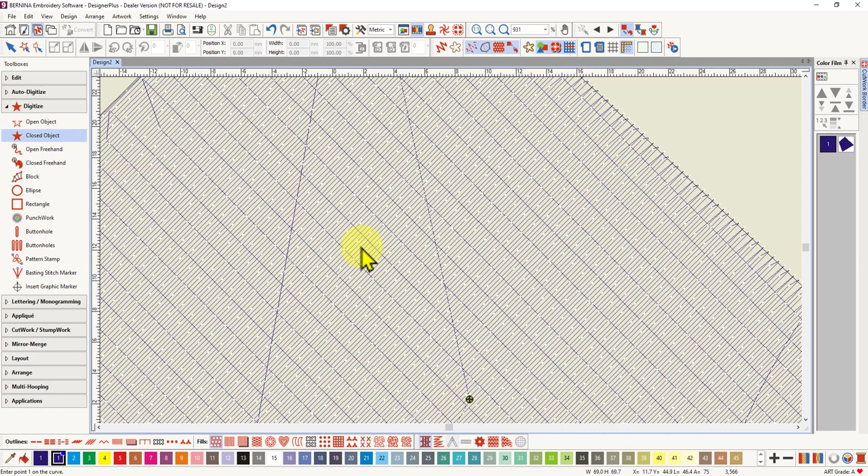If I bring it back into True View, it's a bit harder to see, but you can see that they're all going in the same angle throughout the whole shape. Now sometimes you want the stitches to be going at different angles around a shape.

So there is one way of doing this, using the block digitizing tool. I'll just select that object and delete it.

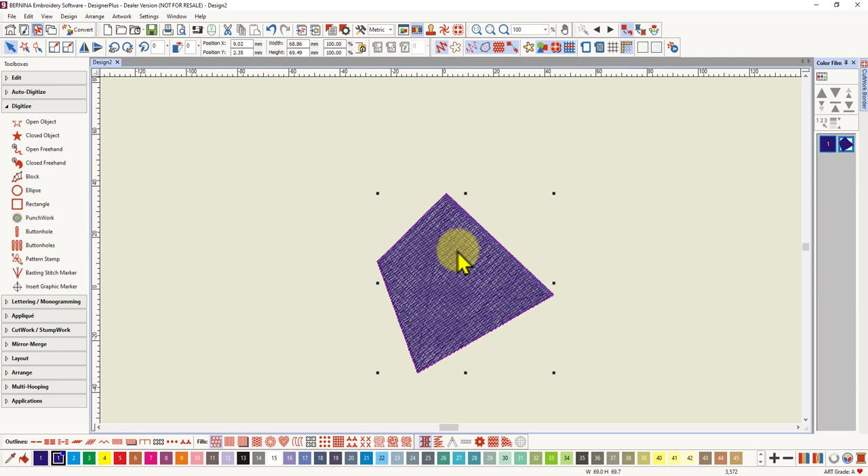You can select an object by clicking on it, or by clicking on it in the color film. So I'm going to, and then you can just hit your delete button and that will delete it. I could have used the undo button up here, but I chose to delete it. There's often lots of ways of doing things in the software.

Right, so the block digitizing tool is here in your digitize toolbox, so you can just select it. Now, you can use left or right clicks. I'll start with just left clicks, and this will give me straight lines. Remember when we were digitizing before, a left click gave us a straight line and a right click gave us a curve. So we're going to use 2 left clicks to start our object.

So I'm going to left click, and you'll see you've got a string, and then you left click again, and you've still got a string. You need to come back to the first side of your digitizing and left click again, and then you can make this any length you like. These lines that join the 2 outside lines are your angles.

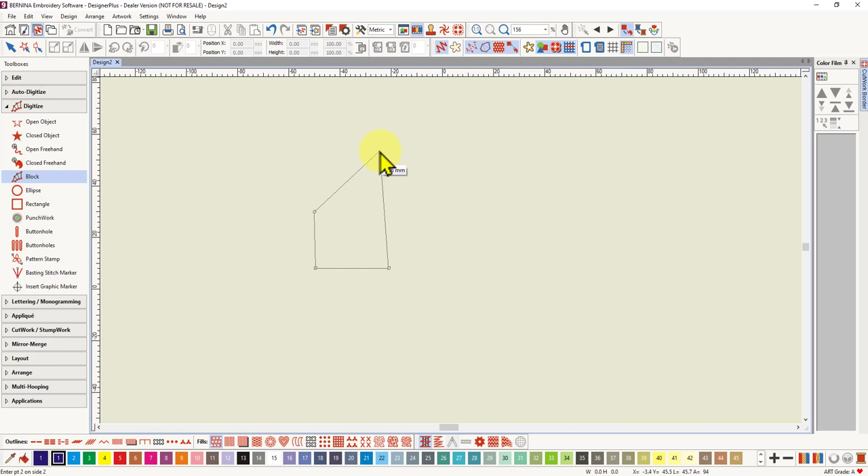So the first angle here is almost horizontal, and then I'm going to do a 45 degree angle roughly. The little measurement is telling me how long or how wide my stitching is for the object. So if you're doing satin stitch, that's important. I'm making a very big object here, but never mind, we'll just continue on.

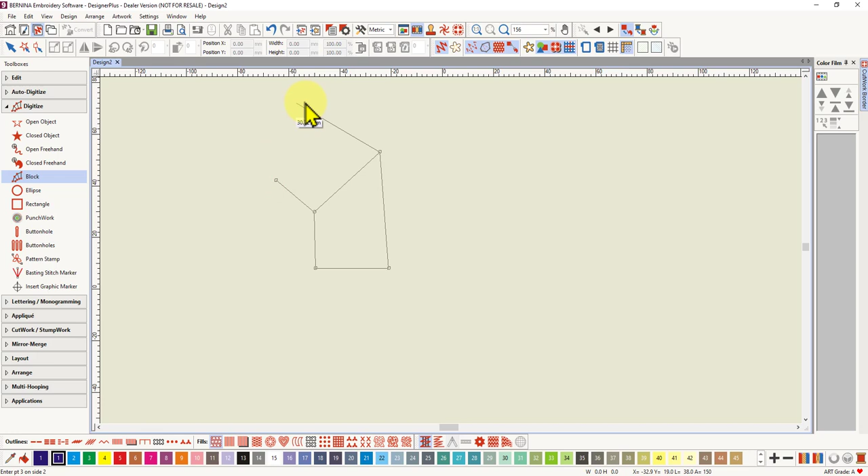So if I left click here, I've created that angle and I've created a block, and now I'm attached back over here. So I can create my next block. I can left click here and left click here to create my next block. Left click here, left click here to create my next block. You're basically clicking on each side of the object that you're creating, and when you're happy with your shape, I'll make one more block here, and you can hit enter to create the stitches.

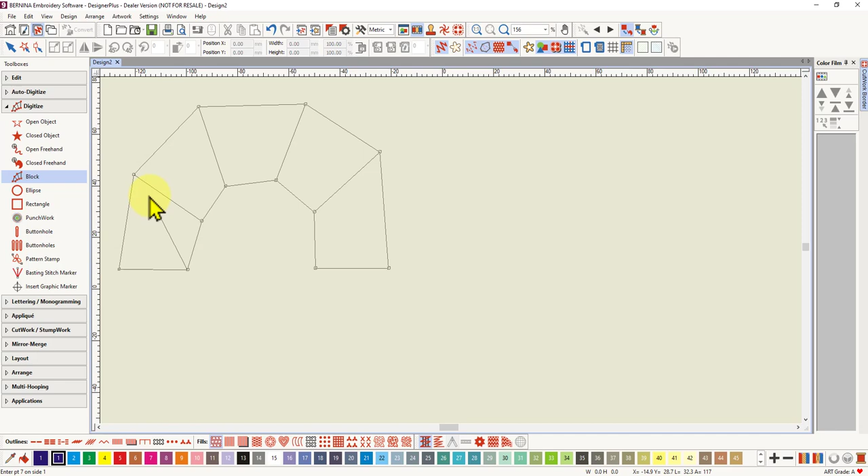And as you can see, the stitches are radiating out. If I go out of True View and zoom in, you can see that my stitches are radiating out in those angles.

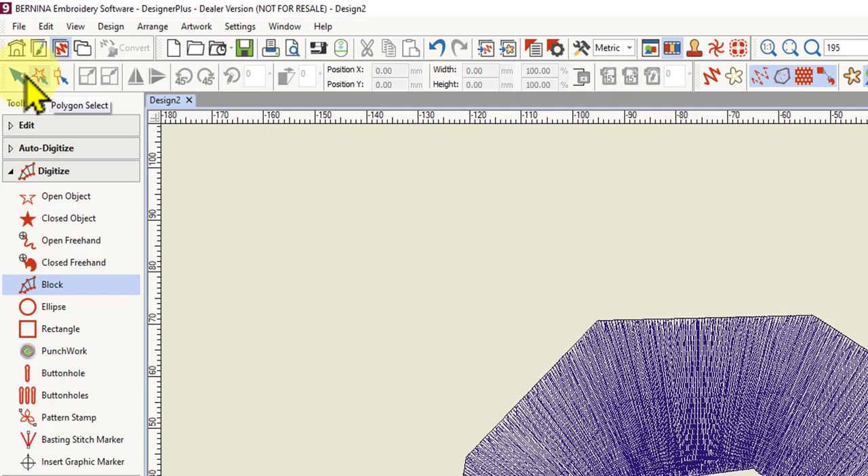There is a tool called the reshape tool that you can reshape objects with, and that's up here next to the select tools. If you click on that, it will actually show you those angles here with the little orange handles, and if you hover over them, they'll tell you what the exact angle is. That one's 109, this one's 69, this one's 42, and this one is, oh, there isn't one there because that's just the outside.

And same on the inside, it'll tell you if you hover over those as well. So this creates angles, as I said, around the object.

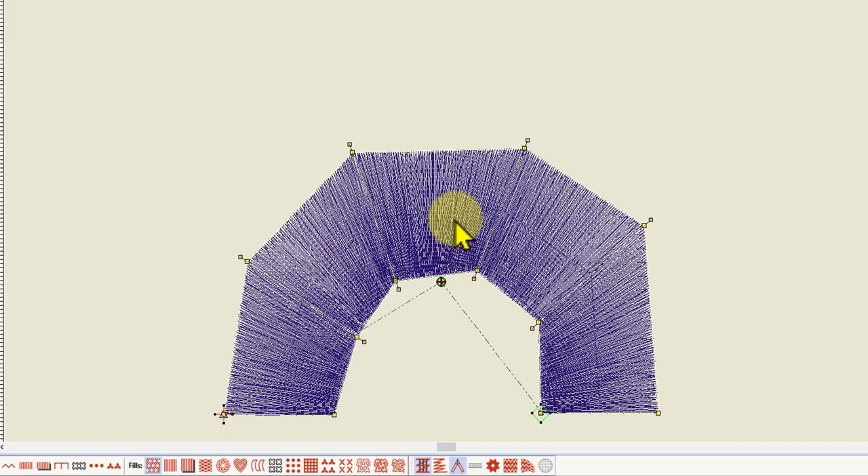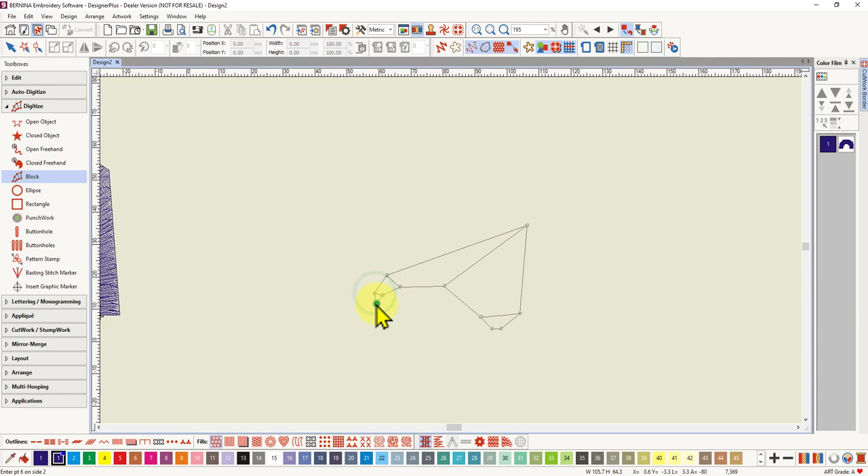Let me zoom out and make a much smaller object over here. You can get your tool again, and you can have a very small block going to a wider block, going to a wider block, back to a smaller block, enter. So you can create, and as you can see the stitches are radiating out.

You can create all sorts of shapes like this. As I mentioned before, we can use right clicks as well. So if I right click, and right click, and right click and right click, it won't curve until I get to the second block. Now you can see it's starting to curve.

So my blocks, my outside shapes are curved, but my angles are still straight, indicating the angle of the stitching. So they were all right clicks, and I've got this curved outer edge. Let me try and do another shape.

So two very close together, two wide apart, two closer together, and two closer together. And you can do them very close together as well by zooming in. So almost next to each other, and then enter. So again, you're just creating your blocks.

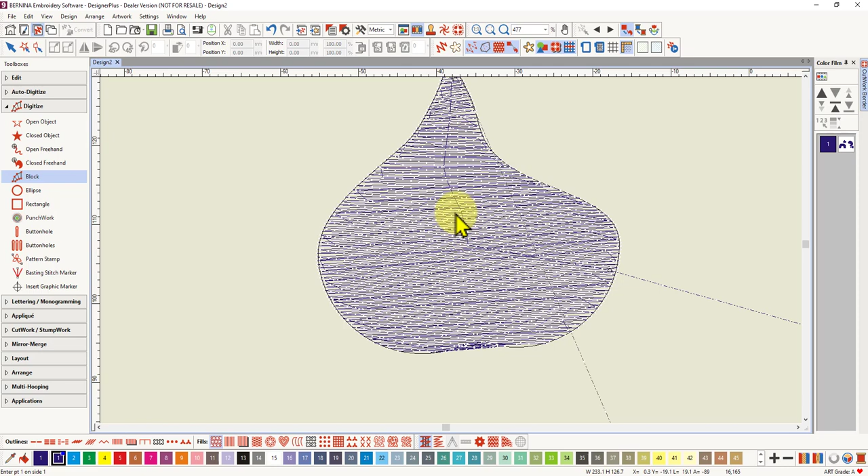In this case, most of my angles were almost straight, so this hasn't created a lot of different angles. But they do vary slightly. So it all depends whether you're going around a shape or whether you're just creating a block, which sort of digitizing you'll use. Go back to true view so you can see all of those.

They're all very big objects. Let me just select them all and shrink them down. I can select with a box select. So that's using my select tool, left clicking and dragging a box around all the objects. That's selected them all, and I can shrink them all at once.

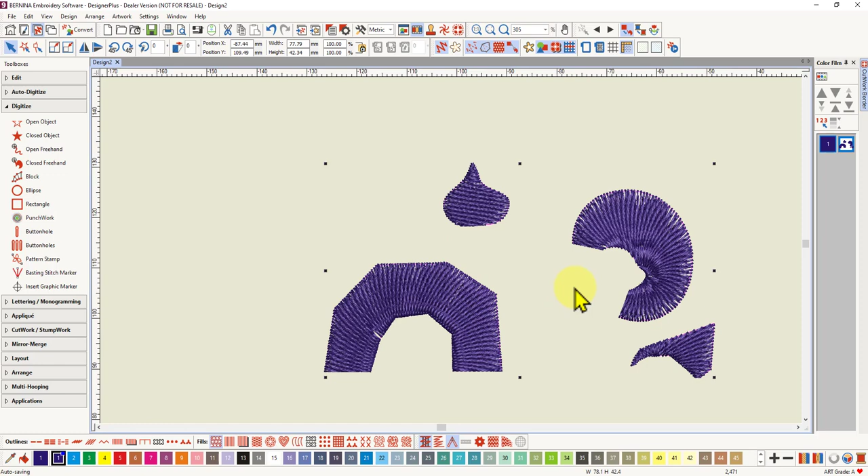Okay, so that's a little bit more obvious when they're this small. And you can see the stitches here start to bunch up where they're coming in closer and closer together.

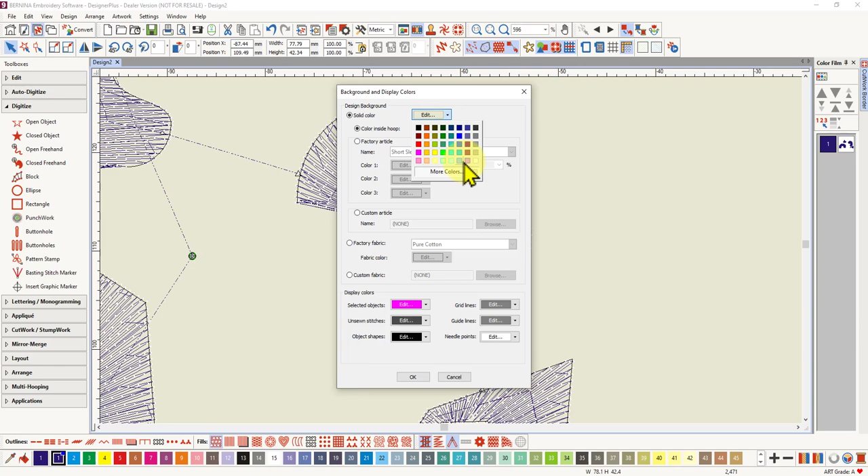If I go out of true view again and we look at the needle points, let me just get a different coloured background for you. Edit that and use this light blue.

Okay, so you can really see those needle points bunching up, but if you look very closely as well, you can see that some of the stitches don't come all the way to the edge, and the software will do this automatically to prevent you from having too dense a stitching where the angles come in tightly together.

So you don't need to panic too much about your angles causing bunching up of stitching. There is a saving grace in the way that the software works out where to stop the stitching to prevent that happening.

Now you can also use a combination of left and right clicks. So let me demonstrate that for you. So I'm going to go to my digitize toolbox, click on it to expand it, get my block digitizing tool, and I'm going to start with left clicks, close together this time, and then I'm going to do right click, a right click, a right click, a right click, a right click, a right click.

Now I'm going to switch to left clicks. Left click, left click, left click, left click. And you can see now my lines have become straight again. My outside edges have become straight again.